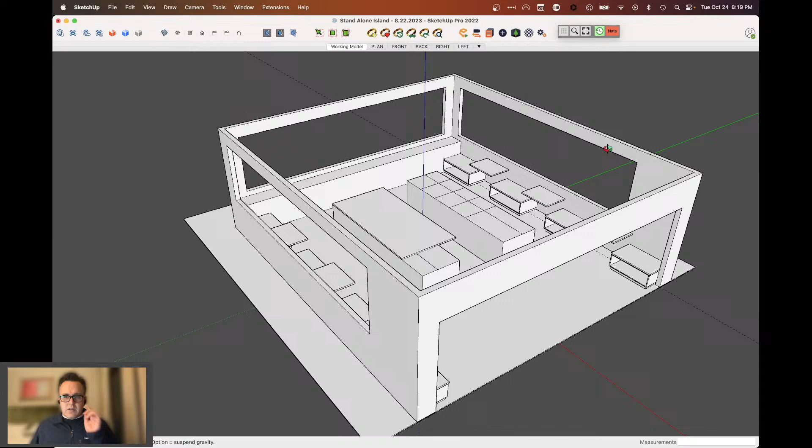I have adjusted my example room here, but before I started, I just wanted to talk about Sloped a little bit. Sloped is a platform that is making an effort to connect with businesses who do architecture design, landscape design, interiors, woodworking, millwork, what else? Set design. I think there's a few others.

Anybody that's in the design fields using AutoCAD, Revit, ArchiCAD, or any of the other products to produce 2D drawings, but also using Sketchup to do design iteration, design development, massing models, those kinds of things, and then offloading that into a 2D program to create drawings. Layout is the platform that SketchUp has made to produce 2D drawings, and for many people, this product is looked down upon as inferior. And I think in the last 10 years, it's been proven pretty convincingly that layout is not that kind of application.

It's a legitimate professional tool that can produce top quality drawings for permit sets, construction documents, whatever you need. So we're endeavoring to show what layout can do, show the professionals that are doing that kind of work. And we're also testing and certifying freelancers who use the product this way, SketchUp and Layout, to produce drawings, so that businesses who have a need, whatever that need may be, can then bring freelancers into their workflow and enhance their employment possibilities and bring in help.

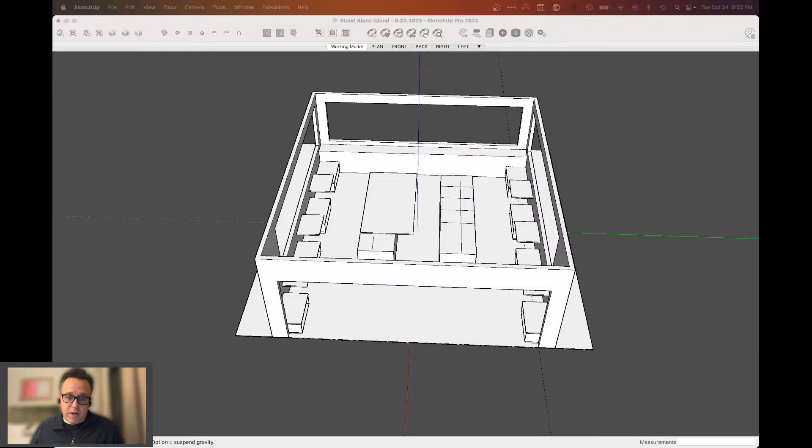And what better way to do that than to have an outside platform like Slope step in and do the consulting and help you build a template, figure your workflow out without all the process of disturbing your current workflow. So that's what we're here to do. We're here to show the value of layout, and our modeling processes are really just here to give us something to go then and show you what layout can do.

And so I've been kind of switching back and forth and showing off my template a little bit and talking to my partners this week. I think I decided I'm just going to start demonstrating some things that this template does, in particular stacked viewports and how those work in conjunction with SketchUp.

And so I'm going to try and break down the process, because we have this term now called SketchUp Ready Modeling. SketchUp Ready Modeling, excuse me, that's incorrect. Layout Ready Modeling. And what that is, modeling in this product with your drawings in mind.

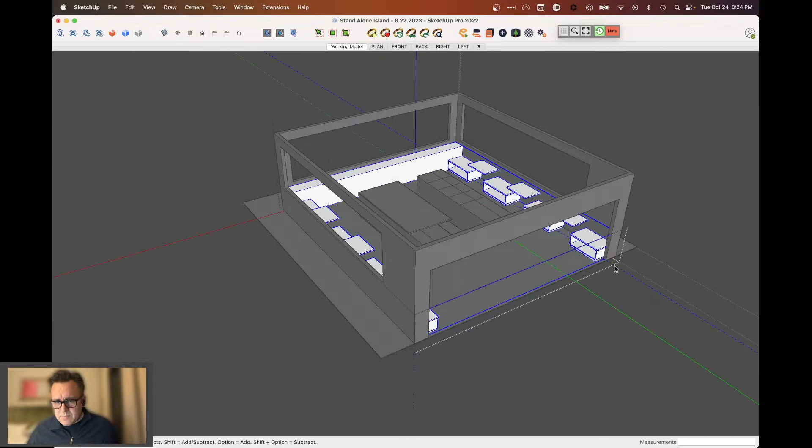And you may ask, well, how does one, I can't seem to get that little, maybe I got it that time? Yeah, okay, it's bothering me.

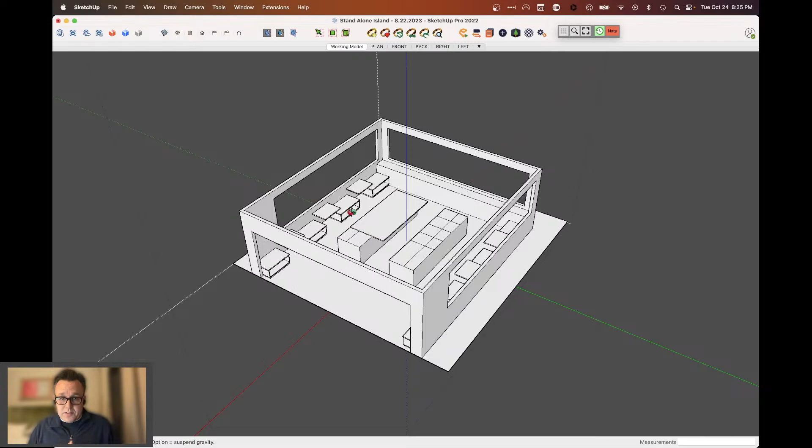So layout ready modeling is what? It's really deciding that the drawings, the permit set that you need to hand off to all your contractors, or to the city or the township or the state or whoever is asking you to supply drawings for approval, that is the ultimate deliverable.

It's not the rendering. Rendering is just part of the presentation. The real thing that you have to deliver is drawings. At the end of the day, we're still not fully in a marketplace where 3D can replace two-dimensional drawings, flat sheets of paper, PDFs. I'd love it if we got there, but we're not going to be there for a little while.

So it's important to recognize then that drafting has never changed, really. I think it's suffered a lot because drafting just isn't taught anymore. Computer presentation is taught in schools now, and design is more focused on, but old school drafting stopped in the 90s. While I'm hearing there's resurgence in certain schools, it's not as strong.

So drafting principles aren't necessarily the first thing we think about when we go to layout. We're just trying to throw things on. We don't think about line weights, but there are methods to establish line weights inside of layout, and you accomplish that using a number of different features inside of SketchUp.

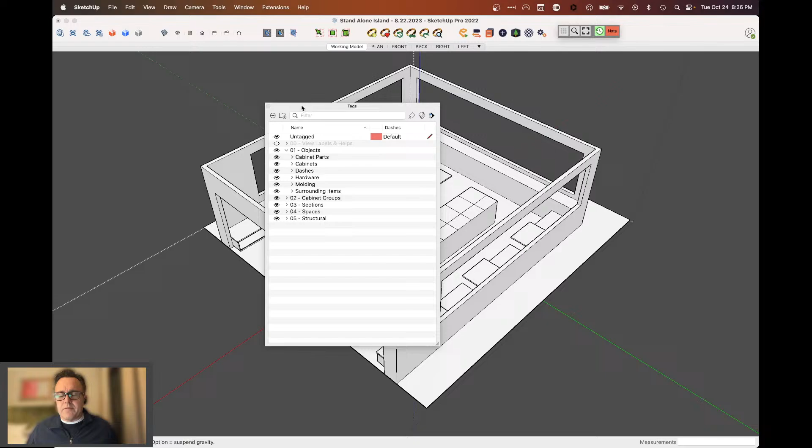So the first one obviously is tags. And tags, for some people, aren't important, and why I don't know, but tags allow a lot of control. And you would say, well, it's just visibility. I say, well, visibility is everything when you get to layout. So having a very robust tag tree and organization system is important.

My system is not going to be what you're used to if you're in architecture and interior design and you're working with entire houses. My system is specifically geared towards individual room construction. I don't have to focus so much on how rooms in a house interrelate—the architects have already done that. I'm strictly worried about millwork. So my tag tree is a little bit different, but in some ways it's the same.

We have a folder for structural tags. In my particular case, I have a folder with different types of spaces, based on my template, which maybe down the road we'll talk about. And I have different kinds of sections because I'm doing something unique that I'm going to start showing off in this template—section cuts without the need for the actual section cut tool, which eliminates the need for a thousand scenes.

And scenes are listed right up here if you're not familiar with these. This is how we take a look at the model that we have. Sorry, I'm going to turn this down—I had it running and it's not live anyway, so it's starting to interrupt me.

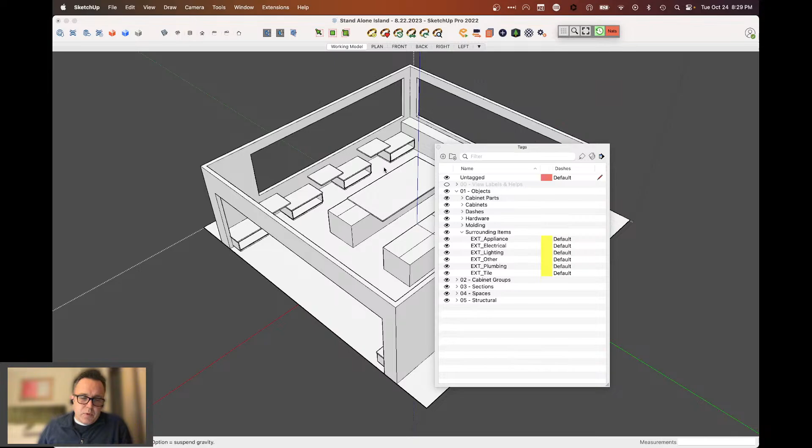The next thing I have is hardware, and then I have what we call surrounding items or exterior items—things that aren't a part of millwork or cabinets: appliances, lighting, plumbing, tile, and then the ever-present other tag.

So tags with the other major one is scenes. With scenes, we can create different types of views of any particular room, house, object, set, exterior landscape, whatever. Scenes allow you to take pictures basically of your space, and you can create a lot of those—elevations of every single room, section cuts, plan views, 3D rendered views, whatever you want to do.

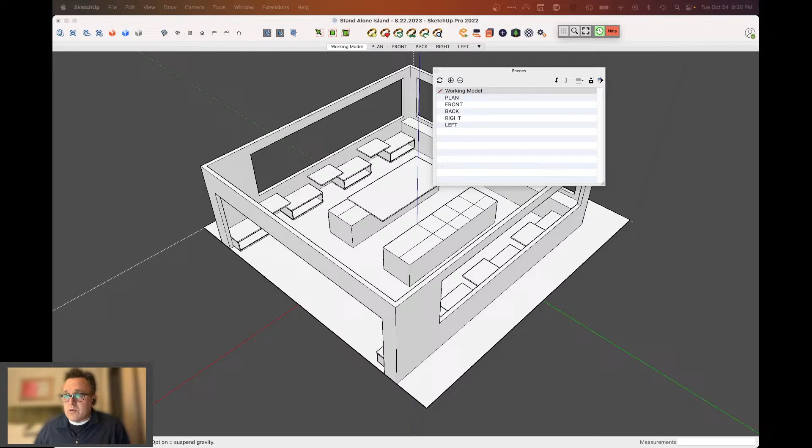So tags and scenes work together. I turn off what I don't want to see in a particular scene. So let's take a look at what that actually is. Here's a plan view of this room, and I have certain things that I can turn on and off.

So we'll go to the objects here, and we'll start turning things off that I know will go away, having to do with this one right here. You know what, maybe I don't have anything tagged yet. Doesn't look like it—oh, something went away, the countertop. Now you can start to see what tags have to do with.

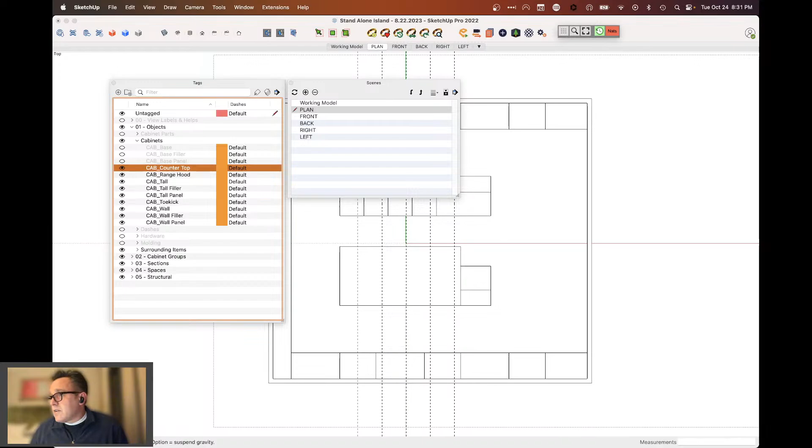I'm turning on something above these cabinets so I can see what's underneath. That's important for a plan view. If I don't want to see a countertop, I have to switch it off. Now, for me, I like to have my countertops turned on.

And that brings in the next important piece of equipment. I'm going to get rid of all these because they're not important. What is important is styles. So these three particular things are the keystones to working within layout. Now that's generally true.

I don't want to oversimplify it, but if you can understand these three panels inside of SketchUp, you're setting yourself up really well. The other thing you want to do before I go too far is understand groups and components. And this is vital in the Entity Info panel here.

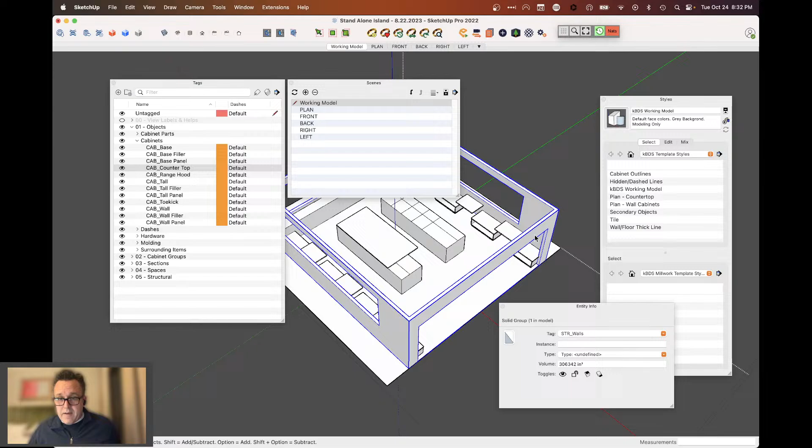I have, let me come out, so we have this tag, 401 room name. Now that tag is in spaces, and it's right here. So the whole space is named under that tag.

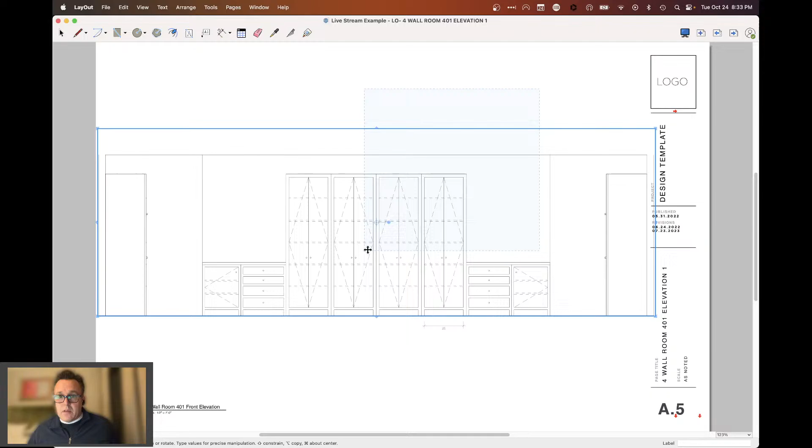So if I have more than one room, when I go over to layout, I can show you this right now. Let me identify that and bring this panel over, because this is the link to SketchUp.

And here we have tags, and right here I have spaces. So if this elevation is actually pointing to this room in another file - I'm not connected yet, but just for the sake of it, now you understand. What we're trying to do is group things so they show up, and then this particular set of viewports is only showing this room and nothing else.

This is radically important if you have massive models. If you only want to see certain things within a viewport, it's great to be able to turn the rest of the model off and not have it visible, because that's less processing power that layout has to use to render this set of viewports.

That's not a big deal if you're talking about 2 or 3 pages, but if you've got, like some people, 50 pages, and there's massive detail in each one of these elevations or rooms, that's a lot of computing that the layout software has to do to render a page. This is where layout becomes clunky for people, but mostly it's because they don't understand how to control what is being viewed inside these viewports.

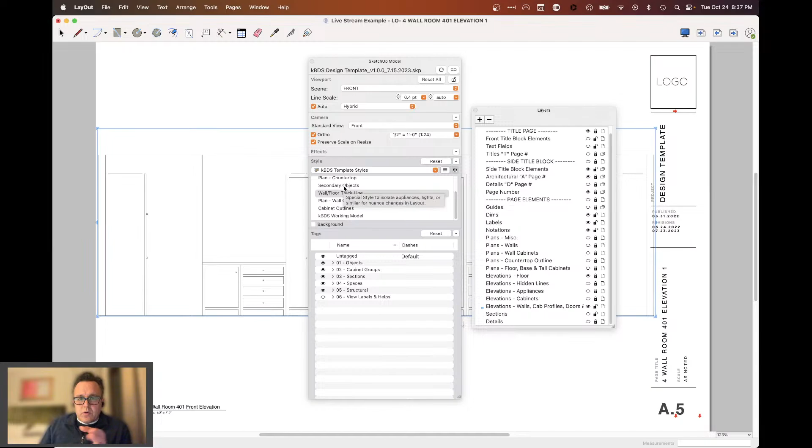And that's where this comes in. This is a unique thing. I don't know if anybody's discovered this about layout, but this is a problem. It's been verified on the forums that viewports can lose their style and they don't update or stay updated. And it's a problem that I haven't solved yet.

So I have to come in here and switch this and get it to look like that. And then I can turn this one off. And now I turn on the cabinets behind. And what I don't like about that is this should not be hybrid - it should be raster.

And now you can kind of see we got some depth, which is a traditional drafting technique. Heavier lines are around the outside edge of a set of objects.

Let's go to cabinets, and I'm going to make sure this one has cabinet outlines. Now we have cabinet outlines, and we can get rid of that and take a look at it.

And then hidden lines. I just want you to watch me go through this because this is the easiest way I've found to deal with stacked viewports. It's not so complicated, as long as you know how to turn things on and off. It's best if you're working with a group of them to keep them all off and turn on the one you want to work on, then highlight it and do what you got to do.

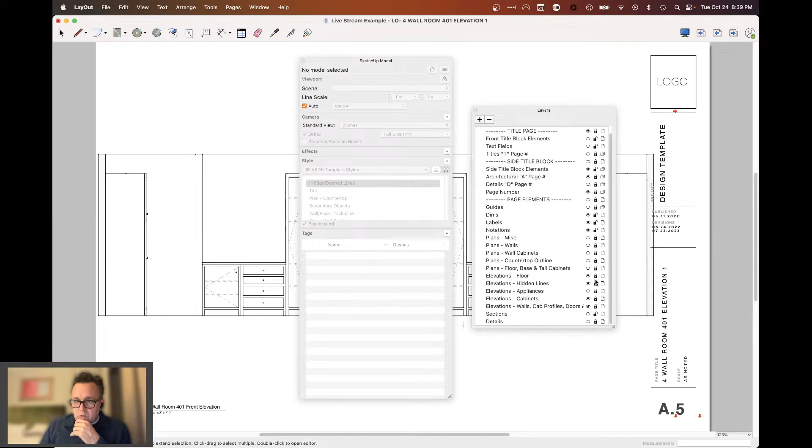And then the floor is the thick line. So now we've got this baseline in our drawing, and it looks really good.

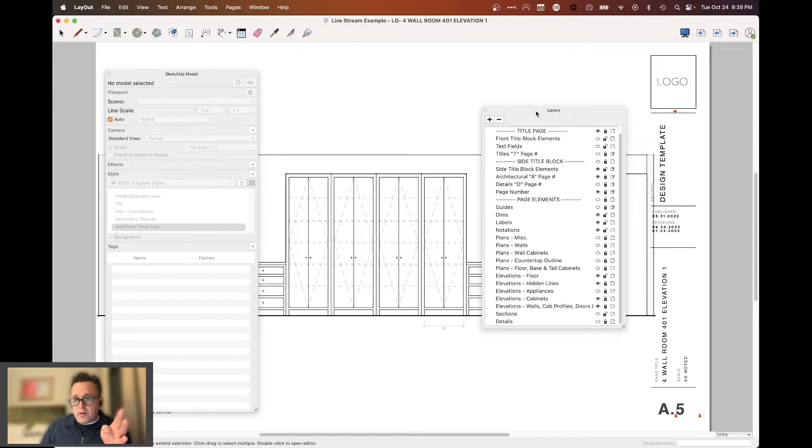That's kind of fun to watch the process happen between SketchUp and Layout. This is getting pretty close to traditional drafting, at least how I learned it on the drafting board and then later on AutoCAD. We're getting something approximating traditional drafting using Layout, and this is a 5-stack viewport.

Some people will say that's too many. I'm maybe heading that direction because there's the power of this particular product. When SketchUp brought in the Layout panel, the amount of control you have is astounding.

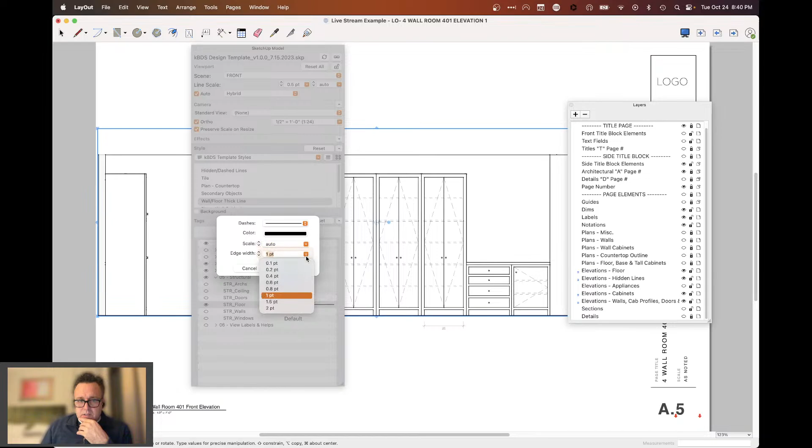What's really fascinating is if I want to change the line weight of my floor, I can click on this, take it up to 2, hit OK, and it'll thicken that line up. You just saw it grow. There are some really nuanced things you can do now with 2D line weight, and I'm just barely touching the surface of what's possible here.

There's... I don't know, maybe I have those here. Yeah, here's another thing. This is a detail page in my template. These are scrapbooks, and how these are being controlled is the very same method.

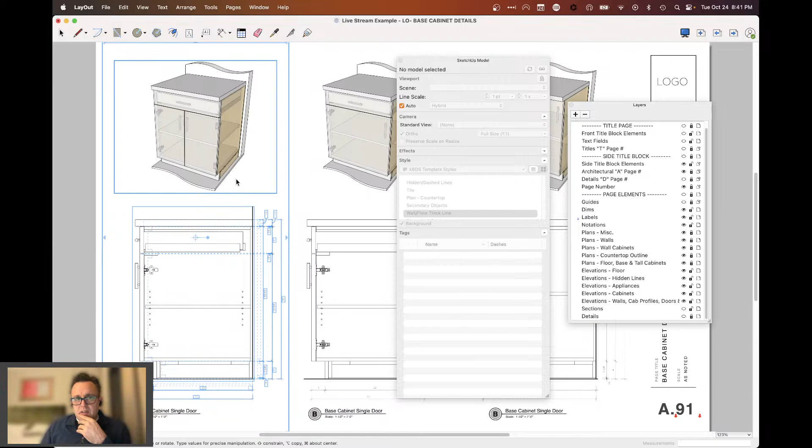It's using Layout to apply different styles for different layers, so you can show interiors in a smoked-out version like this without it overpowering, and get a sense of the exterior and interior at the same time. That's all controlled through this one single panel.

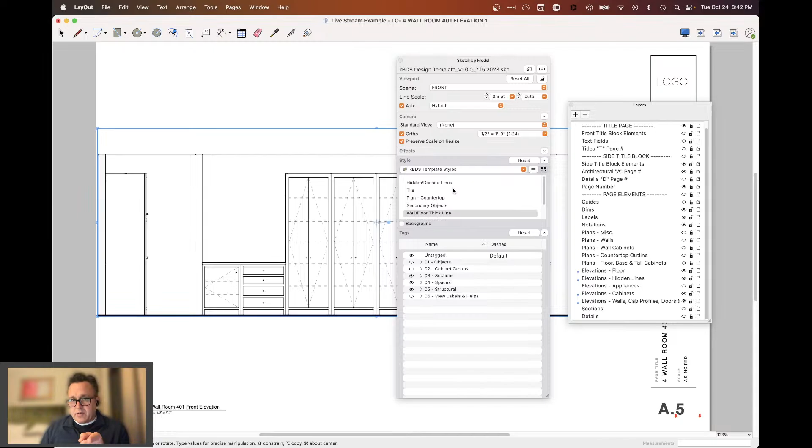This comes back to the very important factor — let me get back to this one — that you have to understand tags, you have to understand styles, and then you have to understand scenes. This is where it gets a little technical from my point of view, and we can go back here.

Maybe I need to take a look and see if we got any. Whoop, lost my... Sound is decent. No chats yet.

Okay, so I'm gonna put some of this stuff back here. What I was gonna say is this is why it's so important to know how these three work together.

I need to have tags so I can control what is seen in a particular scene, and then I need to have styles to give scenes, or particular parts of a scene, different line weights or visuals, because there are different things you can do even with styles to really make your plans pop.

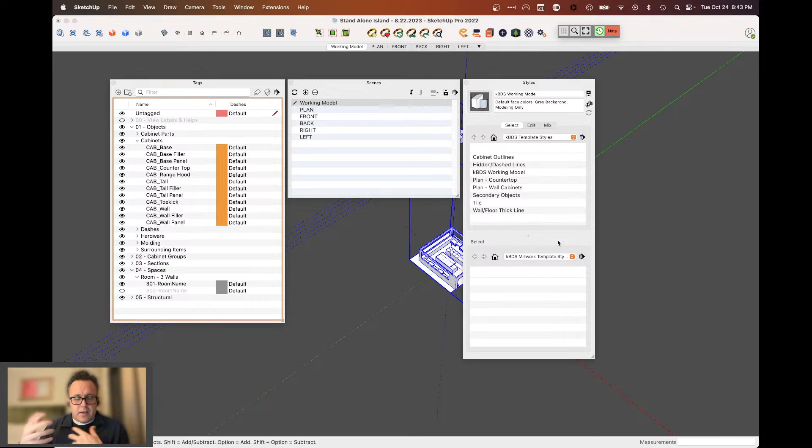Someone like Nick Sonder, who is well known in the SketchUp community for his early work on developing these systems for SketchUp and Layout, his method is to use color. That's not my particular thing, but I think he has mastered that presentation process. It's actually had a major influence on what I do.

Which is only me saying that styles allow you, the user, to develop a very unique, personal type of presentation drawing — hints of color, simplistic line weights. You can even bring in actual site photos and blend those in.

So there are lots of things to do, but it's massively important to understand groups and components, making sure your geometry is properly grouped or componentized, and then assigning all of those the proper set of groups or tags.

As I continue to live stream, this is going to probably become my focus. I'm going to work a little bit on modeling designs — a little idea I've had for a while that I'm going to play with. We'll get this into drawings and start playing around with it so you can see how it develops.

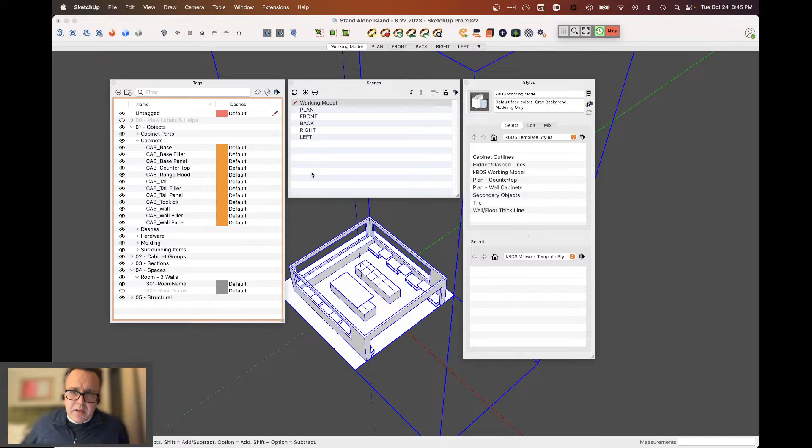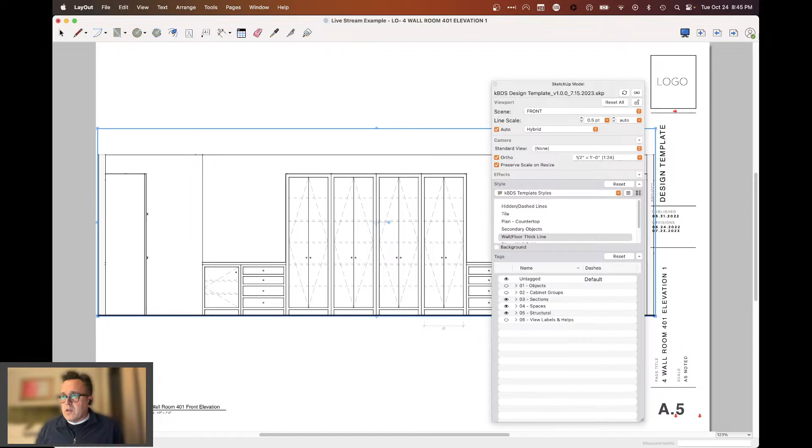I think most will be shocked that we're dealing with only 5 scenes and getting this kind of output. It's going to take a little time to show off, but I think it's something new that hasn't been seen before. It was developed by a freelance professional I know through our company, Sloped - his name's Tom Munson, out of New Mexico. He helped me develop the idea because there was a massive time waster in the cabinet industry.

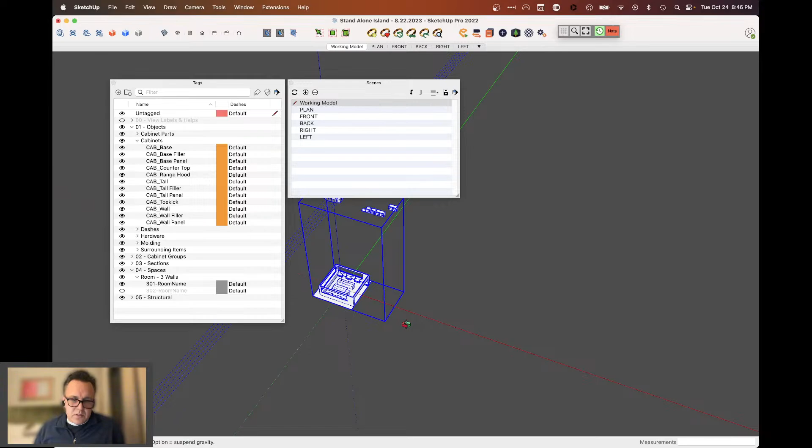We work based on rooms, and I was in the habit of stacking up a whole series of rooms, maybe 25 at a time depending on the job. Taking care of the drawings was a nightmare because I couldn't use any of the standard views in SketchUp - I had to have section cuts by the hundreds just to show all the different elevations, and scenes in the almost as many. Each job was different because there are different types of rooms. So we developed this template that puts all rooms at the 0,0 point, on their own space tags, so you can have 30 rooms stacked up and the only one you see is the one you have on. Then the native views - back, front, left, right - all work for this room.

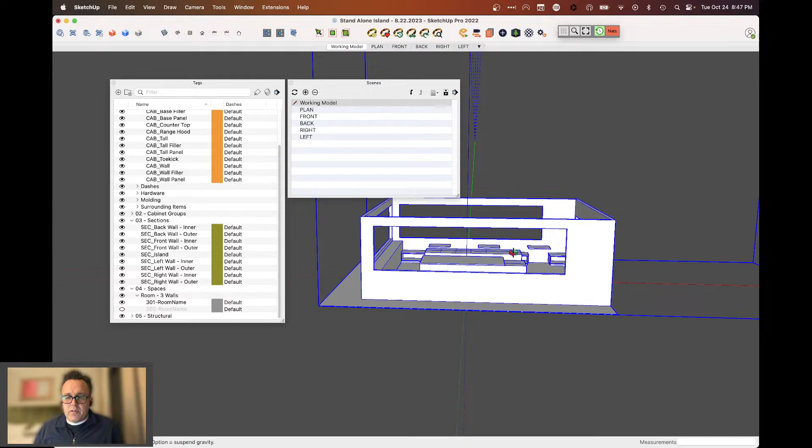So how do we do section cuts? That's where we've controlled walls using sections. All these walls are broken down, and they can be turned off, and the cabinets attached to them can be turned off to get out of the way. So if I want a view of this wall, I can turn this wall off, and the cabinets, the islands, all of those will turn off, and all I see is this far wall.

That allows us to have just 5 scenes, all these tags, our styles - just a few - and then when we head into Layout, we have this result. This result is coming out of a 4-walled room, and there's no section cuts. So I'm getting this view of this room, which I believe is this one here. If you do an actual front elevation view in SketchUp of this, you just see this wall - you don't see these cabinets or any of this stuff. So that's how we've tackled it.

We've got what amounts to a section cut there of those cabinets. If I group these correctly, I can get rid of this, I can see a window in there, I can do a lot of different things to make it look right - all without section cuts, which is astounding.

This is the power I'm talking about, the power that my partners and I have discovered. Layout is actually a lot stronger than you would ever imagine at producing drawings. What I'm trying to do in particular is show how powerful it is with line weights and traditional drafting styles. You can get something very close to the drafting board if you so desire, and you can do traditional layouts, templates, and title blocks.

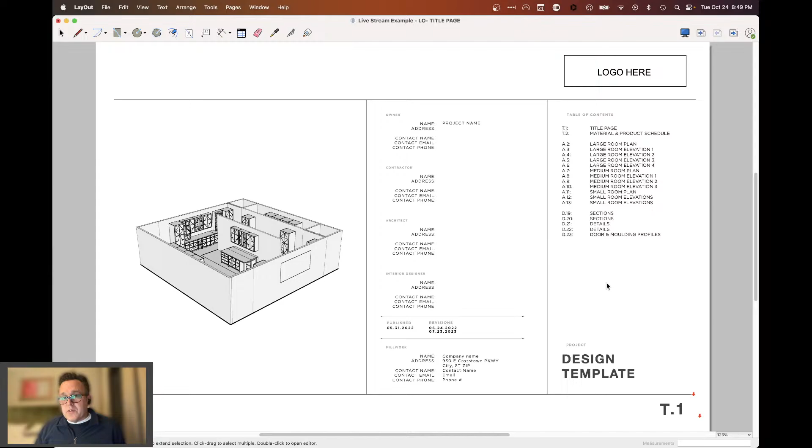LayOut definitely has auto text. There's some things missing that I would really love to have, but I won't bore you with those right now, as they're a little more complicated.

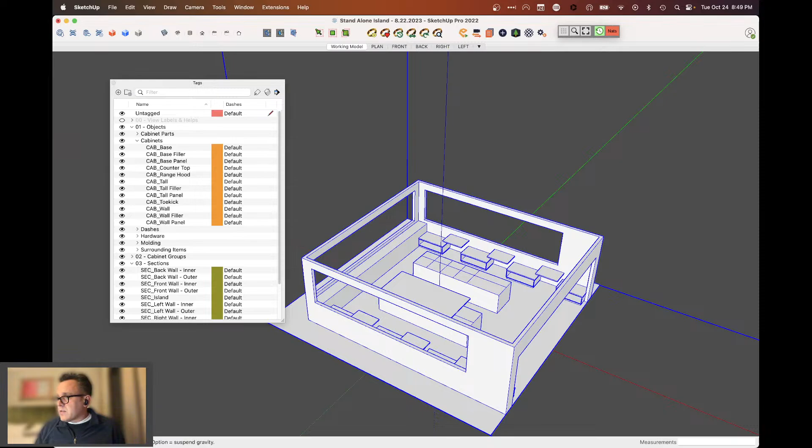So what I'm going to do is go back in here and play around a little bit with this model, just because I feel like working on it right now. You can watch some of my modeling techniques and critique me if you feel like it - I don't claim to know everything. I just learned something today about the scale tool from Aaron on a YouTube video, so I've got lots to learn and discover.

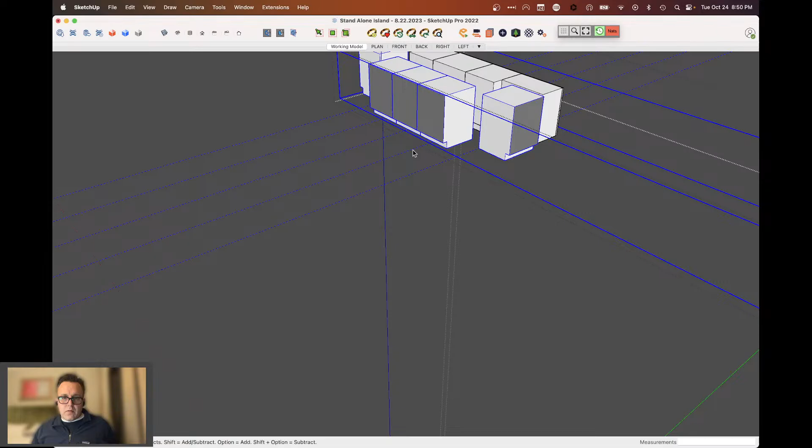I think where I was gonna go with this thing, maybe I'll go leave those up there. Maybe not - let me try and get... there we go, found it. Oh, that's not what I want to do. Oh, don't want to do that either.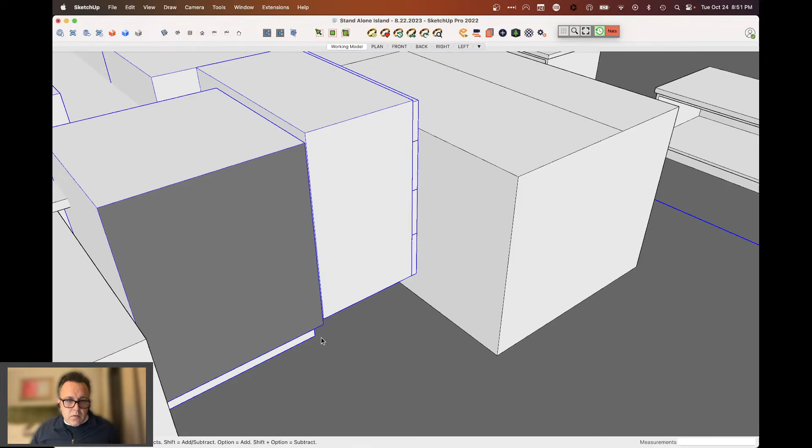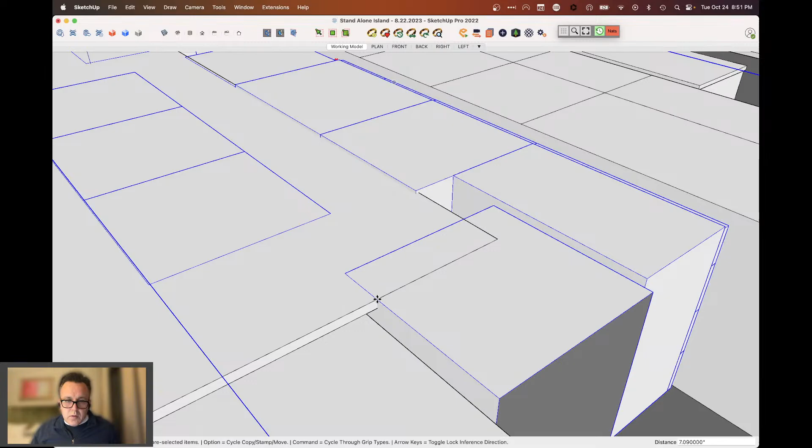Let's anchor that, get it close. Let's see... oh, I guess I can. Here we go, this is what I'm looking for. Now I'm going to move this over this way. There we go. Okay, now let's bring this back up. No viewers right now, but that's okay.

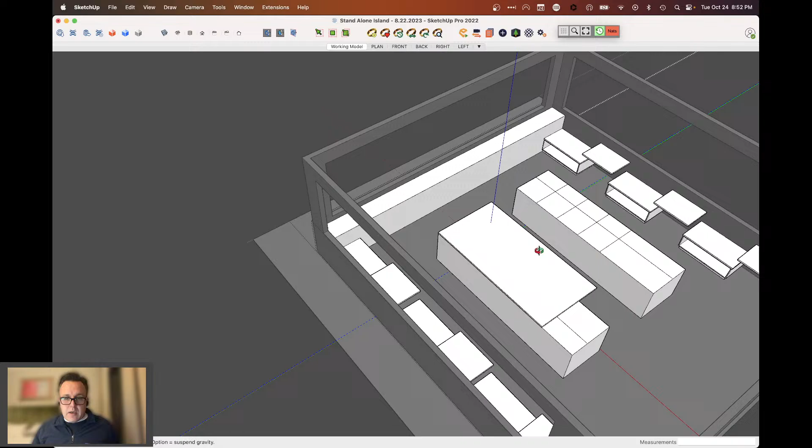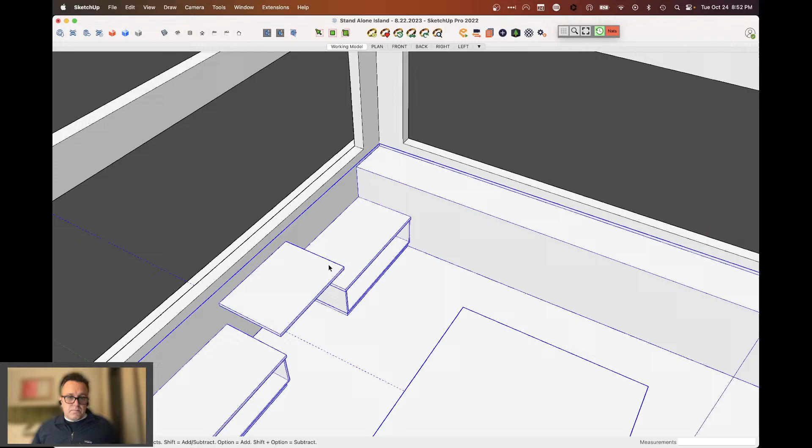Okay, so we're going to now start to try and tackle this little guy here, because I want to have... actually, how tall is this? 34. I wonder if I can go up 6 inches. I can't, so we'll keep it there. Yeah, that's fine.

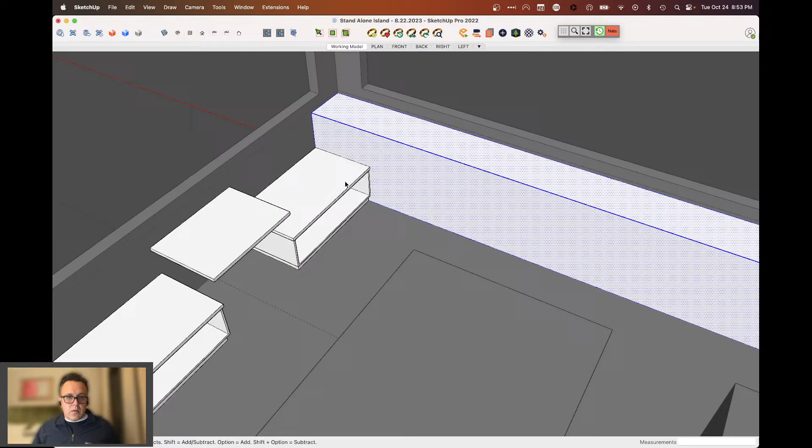I'm going to put a countertop in there like that. Oh, yeah, that's because I need to do that. And then we're going to come over here. And do I have a cabinet with doors? Yes, I do, so we're going to copy that guy. I'm going to come back over here, and we're going to do Command V just to copy it in, rotate it, bring it back to the wall.

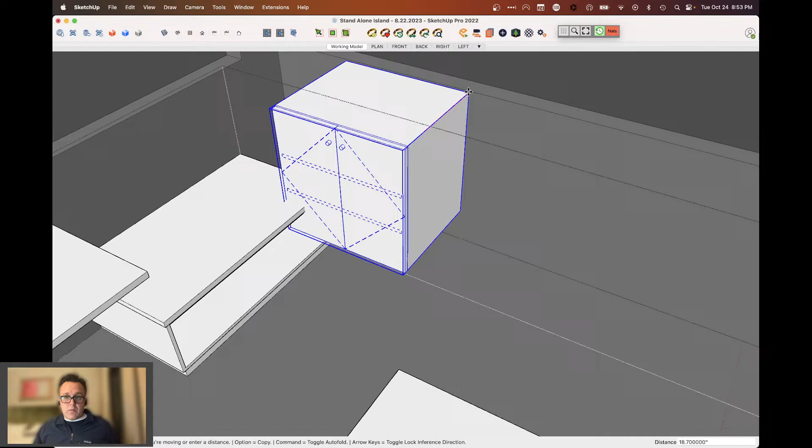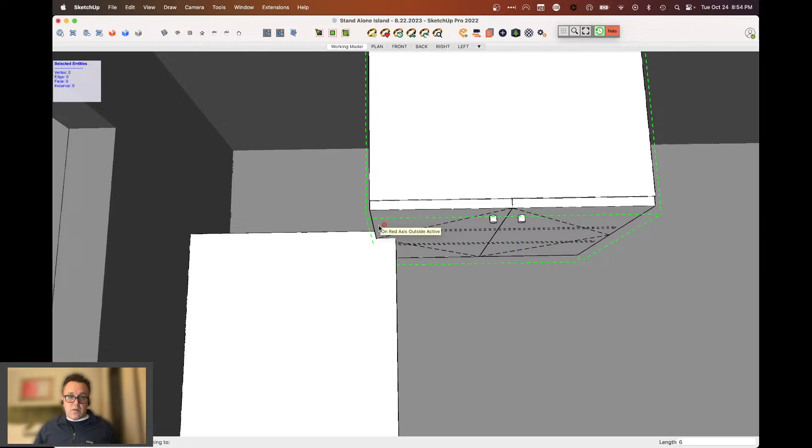And let me do that. And then we're going to use my favorite tool in the world, which is Curic Stretch. If you don't have Curic Stretch, I invite you to go get it, because it is one of the best tools that I have in my toolbox.

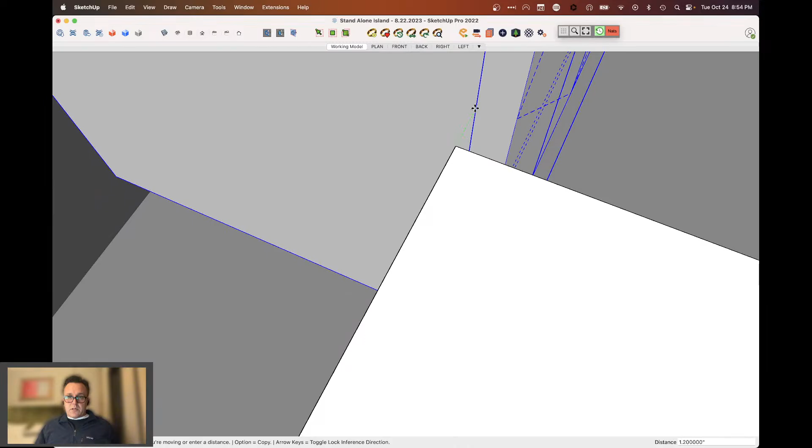Curic Stretch is similar to an AutoCAD function for stretching geometry, and we're going to go 2 inches away from that, and then we're going to go... whoa, golly, I've gotten all turned around here, sorry about that. And we're going to stretch it again. All it does is grab the vertices, and it only stretches the lines. It doesn't warp like in scaling, using the scaling tool.

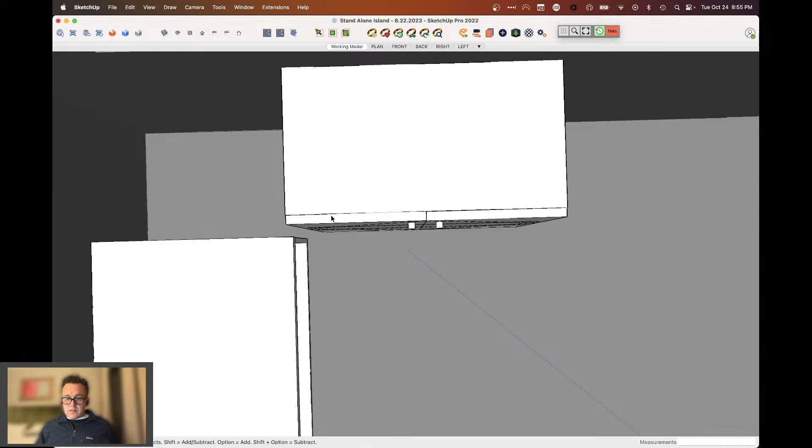Oh, looks like I messed up there. I know I want to go 2 inches back. So now my box is 16, which is exactly what I was looking for. How about that? So now we've got 2 inches there.

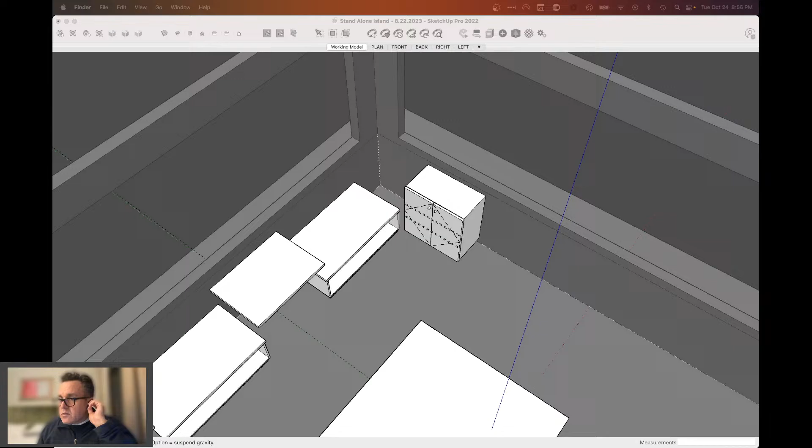Yeah, I'm going to open a product that I have, which is... is not visible. Okay, so I gotta bring it up this way, and it is gonna be... where? Modeling library.

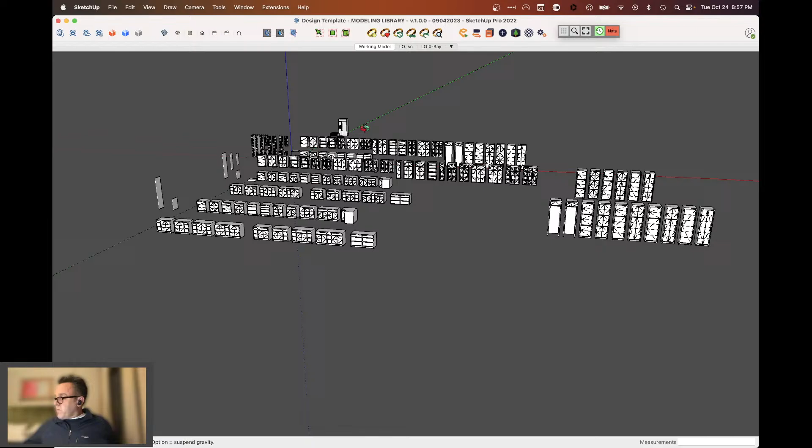Okay, so this is an expanding modeling library that my private studio has been working on. Pardon the pinwheel. And these are elements that I use consistently in cabinet design. We have frameless, a bunch of different variations. We have face frame, bunch of different variations, and this group sits on a toe kick, either toe kick or feet.

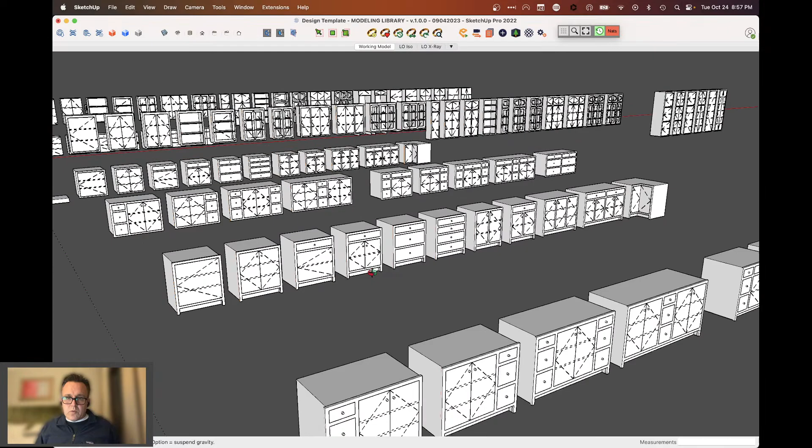And this belongs to that group, and so do the tall ones down there. And then this is a group of what we call furniture-based face frames, which have integrated toe kicks. So there's a whole - these are just base cabinets and talls. The walls are all similar and the same. So then we have end panels of various kinds, and then for frameless we have countertop toe kick and these different types of filler and panel products.

And what I'm looking for right now is to use this guy right here. We're going to do copy, and then we're going to do - I don't know if you know this particular keyboard shortcut, but you can switch through the different open windows in SketchUp. Pardon me, I ate a blueberry and that was a mistake. Now I can't speak.

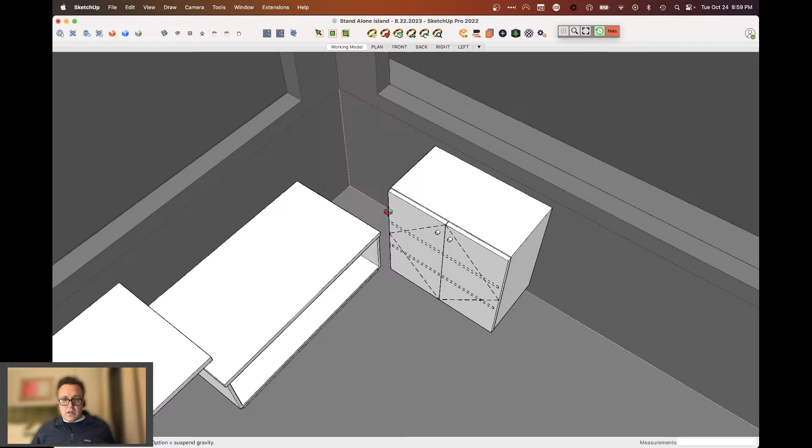You can cycle through these using Command Tab on the Mac - pardon me, not Command Tab, Command tilde, which is the button right next to the number 1. So I can jump through all these real quick. It's a great little keyboard shortcut. You don't have to come up here to the window and that kind of thing, you just scan through them real quick. So this one I'm using Command C to copy, and then Command tilde, and then I can hit Command V, and now I have that product in place, and I can do this.

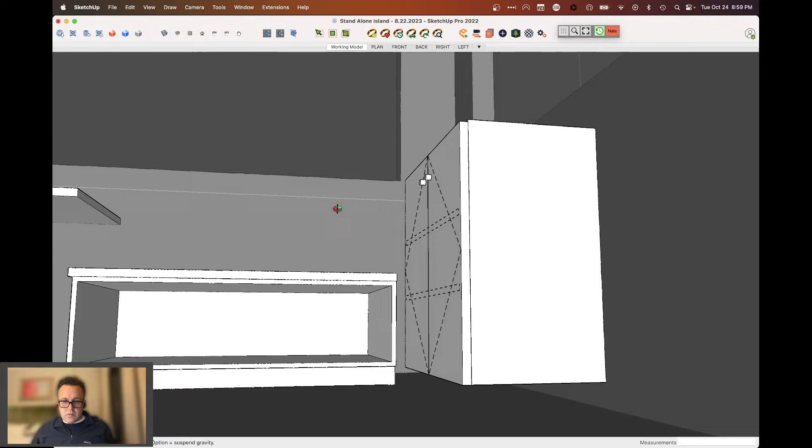I don't know if I have myself, do I? Oh yeah, I do, okay. I can move this guy like that. And this one should be sitting on the floor, I would think, which it is. Ooh, it's under the floor. Okay, so we need to work on that.

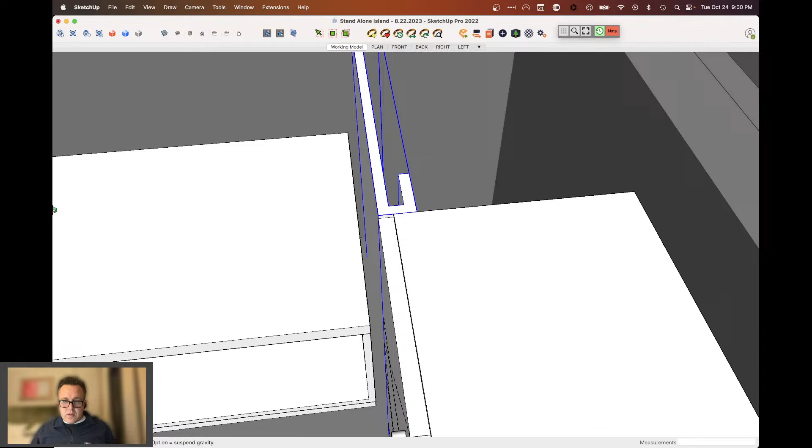And I'm of a mind that this should be flush. Yes, correct. And then we're going to pull this back like that, and we're going to push this over 1 inch. And now that's a kind of a traditional end panel with a dead corner.

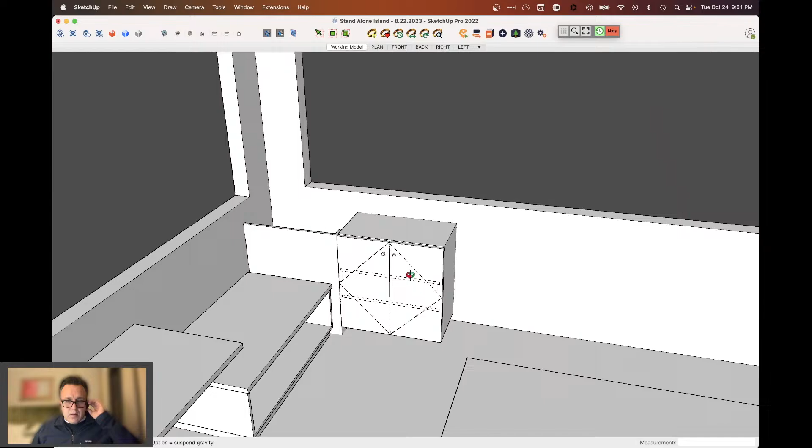Oh, and then let's make sure that we get this in the right spot, like so. And then we can do something fun here, push pull up. So, and then let's see, we are 17. Okay, so I actually want to go back 1 more inch.

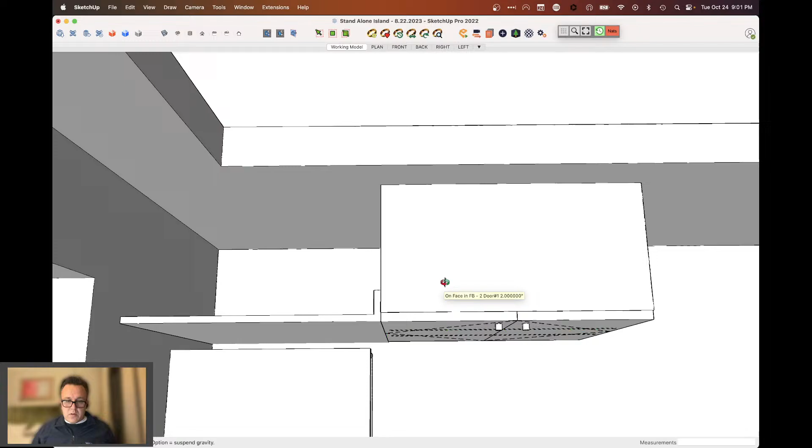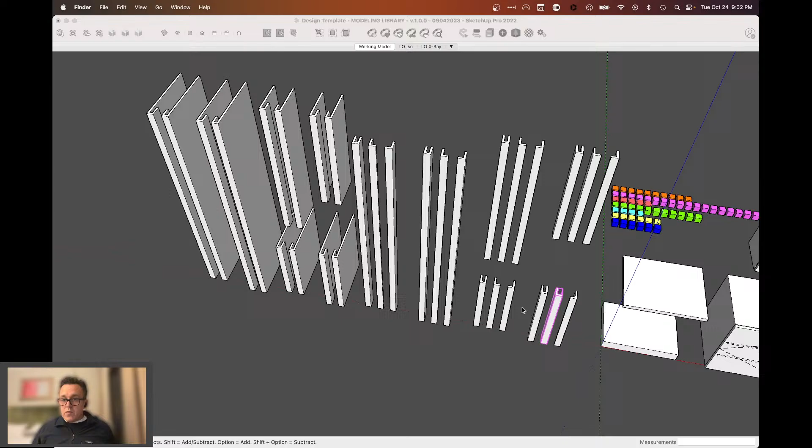Use the stretch tool again, we're going to go back 1 inch. And now I can go tilde back to this guy, and I need this one right here, can do Command V, place this, and yeah, do a flip, and then drop that to the floor.

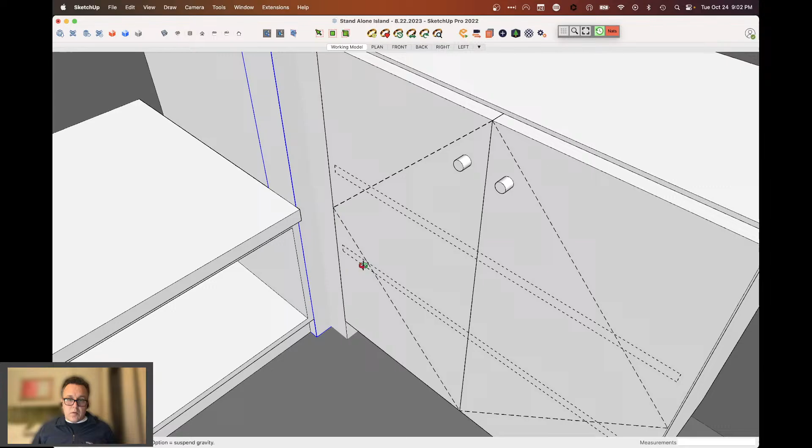Like so, but I don't like this particular thing, so we're going to drop this down below the countertop. Then I'm going to do something there so I can see that extra geometry. Come back here, and now I can activate this geometry.

7.5, yep, that got it.

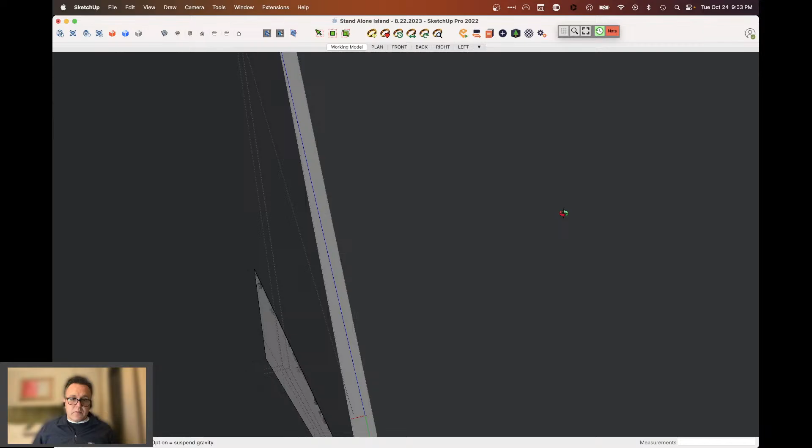Now if you're wondering what I'm doing there, I have a keyboard shortcut at Q that activates hidden lines so I can see around in the cabinet. I really encourage you, as a professional, set up keyboard shortcuts. I've thought about doing a stream about keyboard shortcuts and how to set up mouse and keyboard shortcuts and a Stream Deck.

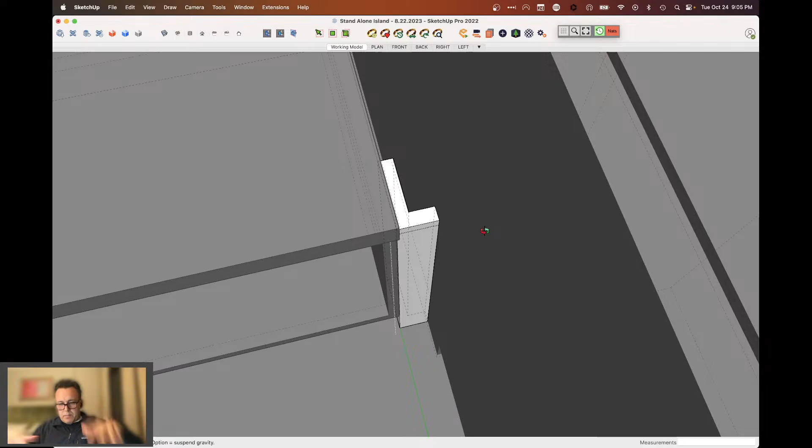So that's basically this setup right here. And I'm probably going to cut it short soon. Since I started late, I'll just make it a shorter stream. I think we're getting somewhere here.

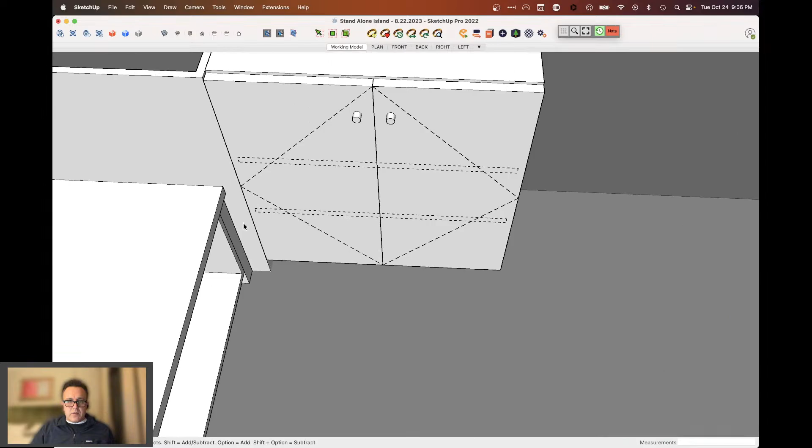I think this one I'm gonna do that. Now we'll end up putting a toe kick down underneath there. But then, what I can do, since those two are the same, I can take this and hit scale, which is Z on my keyboard, hit -1. I don't like that.

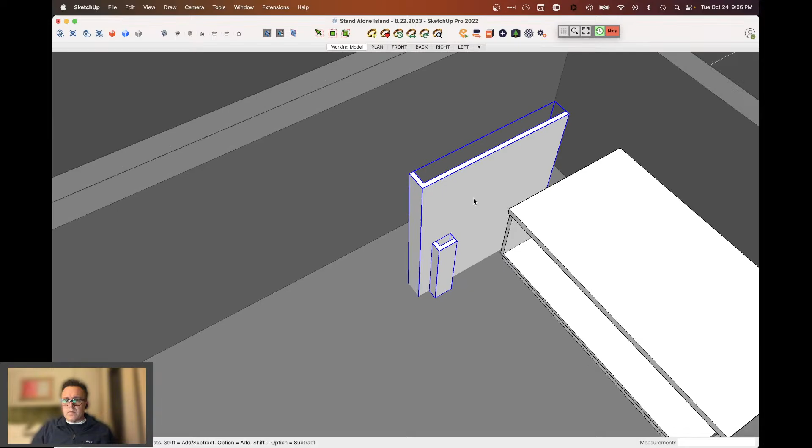Interesting. Did that? I thought we fixed that. Huh, I guess not. Oh, maybe I thought I fixed it and I didn't.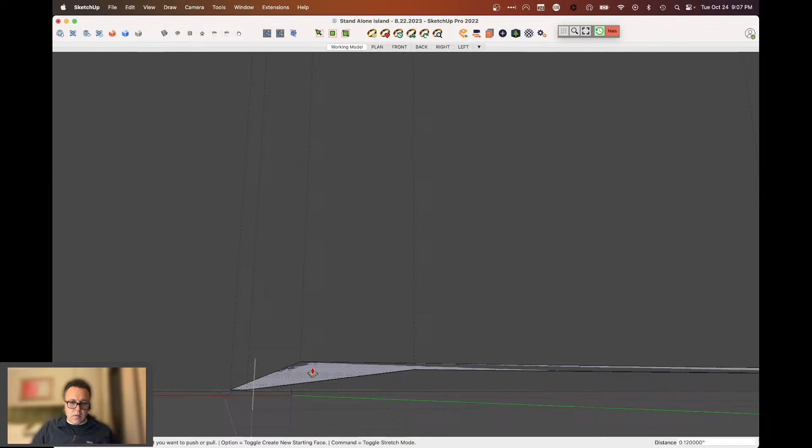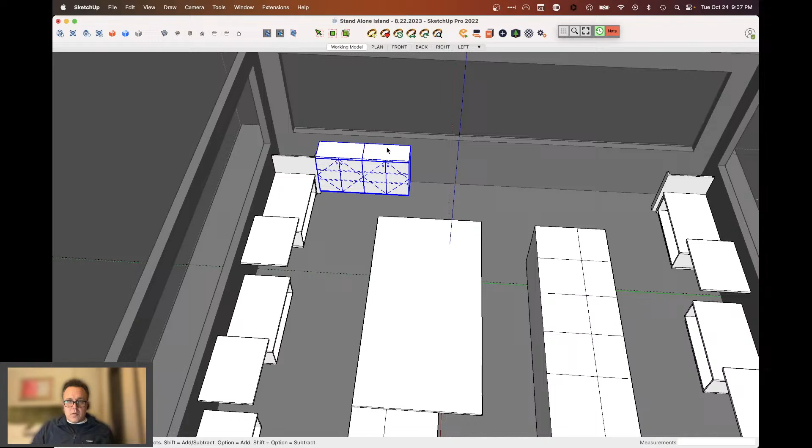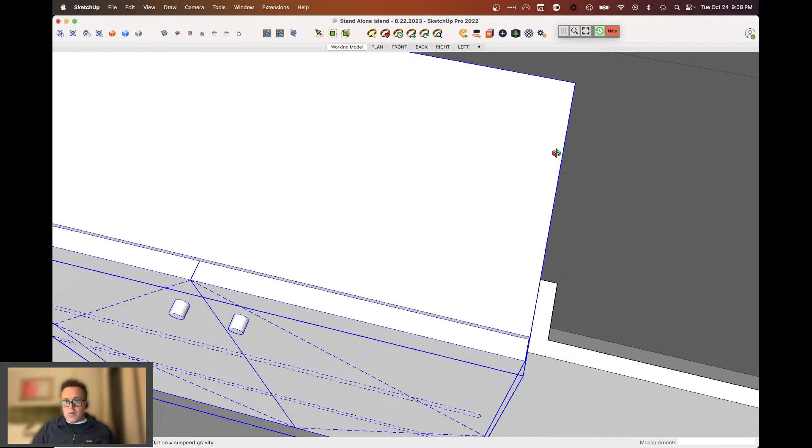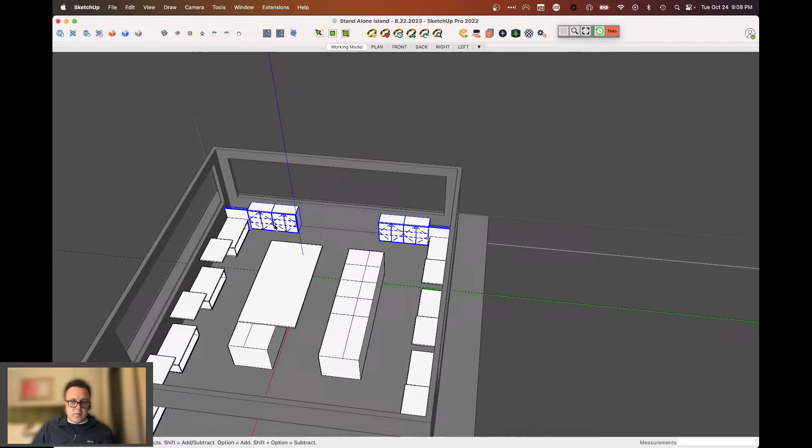Yeah, that looks better. Should have fixed it there because that's a component. That's right. Okay. And then gonna do 2. And then we're gonna take this down. Like that, yeah. Okay. All this and get it in the right spot here. Like so.

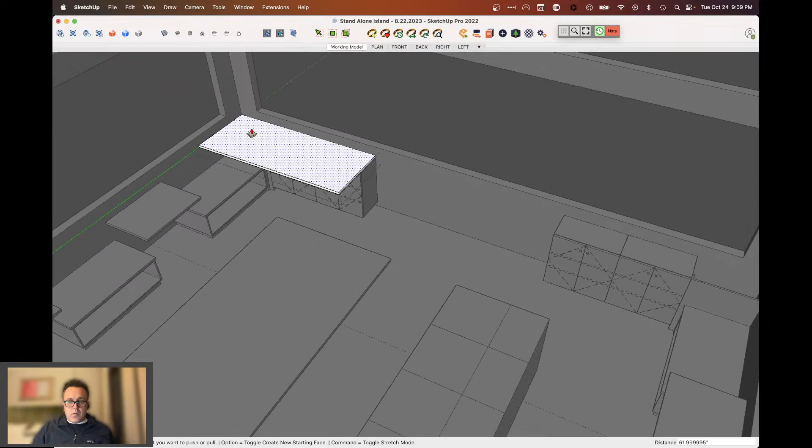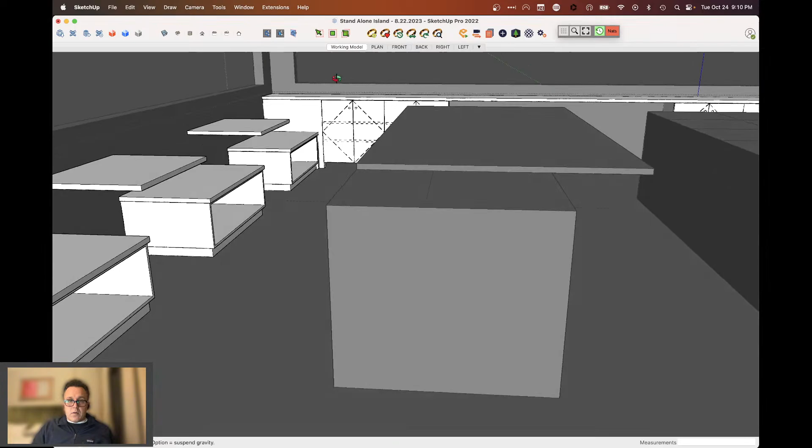Okay, now I can copy this guy. Move that up. Get that there. Oop, didn't want to do that. And give it 1/2 inch overhang. Okay, and we're starting to see where we're going.

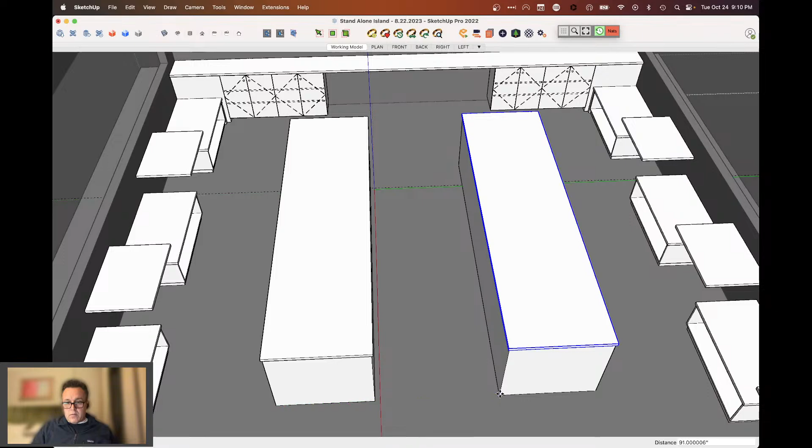I think I am gonna get this guy. And then go 1. And 0.5 and 0.5. And then we're going to take that thing and we're going to put it right there. Okay, we're getting somewhere. Oh, and I think I'm going to deal with my floor. Okay. All right, we're looking much better now.

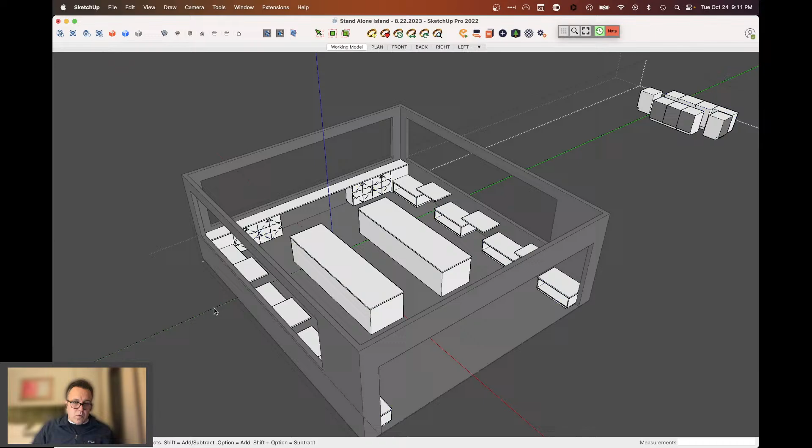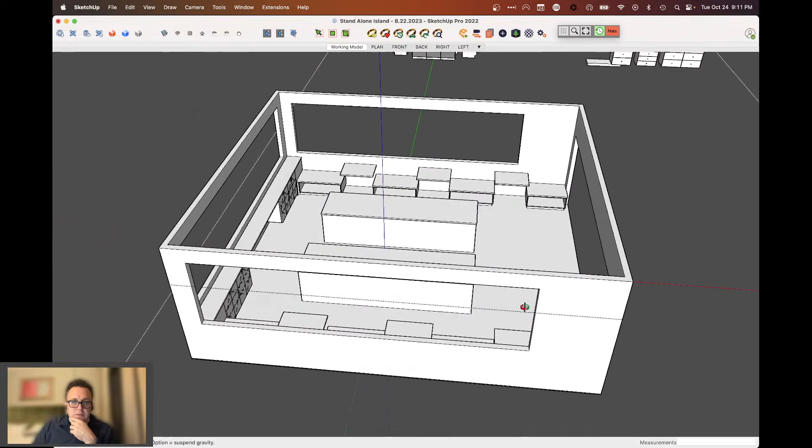Right, we got some cabinets. Maybe you'll understand where I'm going once I get the. I'm gonna plan on putting. I think I'm just gonna develop a whole room out of this, and imagine a roof and ceiling and make it into a whole experience.

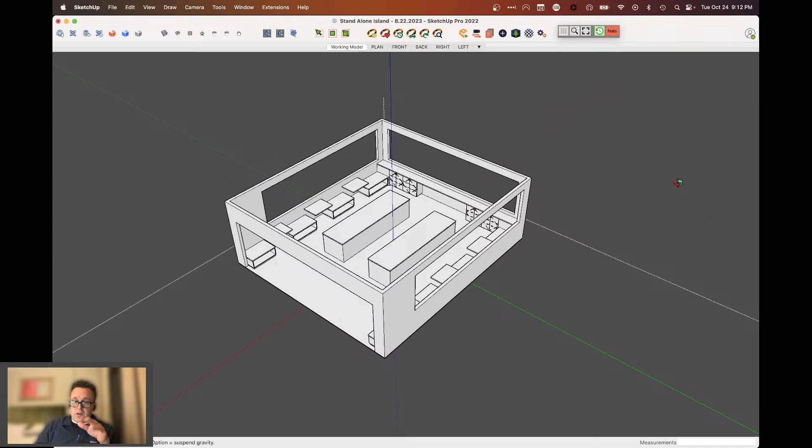Maybe I'll get somebody to render a final shot, and we'll definitely be working to push this into LayOut within the next 2 or 3 streams, so you can see how we actually take this raw geometry using this 5 set of scenes and our comprehensive tagging system. And I think that's another thing that we'll be able to do is you'll be able to watch me go through and tag everything after we get it modeled, which will be a good experience. And why I tag what I tag, and you'll be able to see that as it develops in LayOut. So looking forward to that in the coming streams.